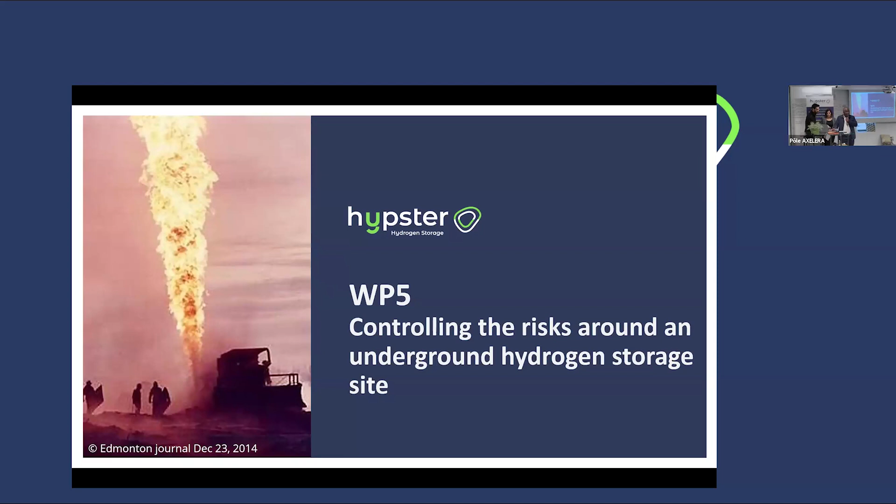Thank you so much for having me. I will now present... okay, thank you so much for having me. It's not working. No. Another mic, okay. Maybe you can talk about the picture. Yes, I can, is it okay? Yes.

I'm from INERIS, the French National Institute for Industrial Environment and Risk. I'm in charge of INERIS's contribution to the HyPSTER project, but I'm not alone here. I come with two colleagues, Sylvain Pic, senior safety engineer, and Benno Weinberger, our hydrogen expert.

As an introduction, Europe has made the development of a green hydrogen industry a priority in its strategy to combat climate change. The HyPSTER project is a great opportunity to develop experimental facilities in France to store green hydrogen in salt caverns.

This opportunity should pave the way for developing a hydrogen sector at industrial scale, which could be replicated technically and economically across other countries. At INERIS, as a reference institute on industrial environment and risk, we consider hydrogen a promising alternative energy to fossil fuel, which can be created with renewable or low carbon energy. INERIS is very proud to contribute to this kind of project.

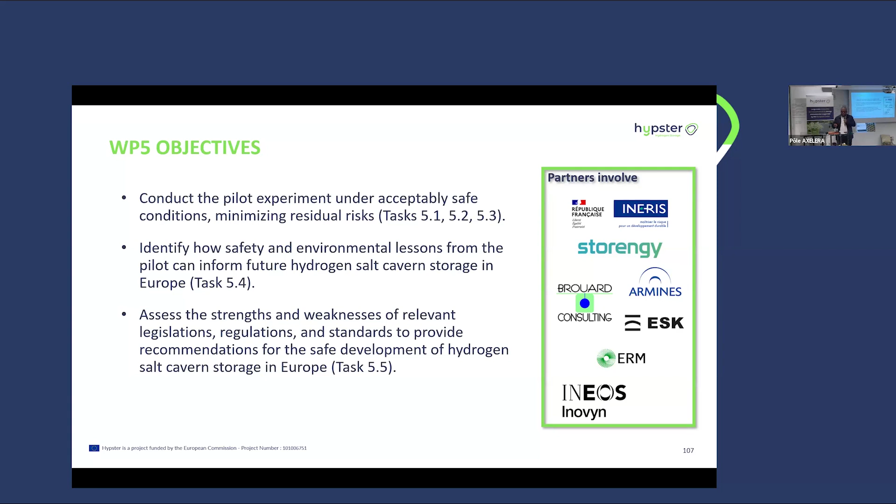So what about the challenges? The first challenge was to evaluate the risks: to identify, assess, and control all types of risks the pilot could pose to people and the environment. We did a lot of study on risk assessment, with a risk methodology in my company developed with the contribution of Storengy and other partners. We also did geomechanical assessment of the very worst case scenario.

As you saw in the previous presentation, we are trying to build a demonstrator, and from a risk point of view, we try to analyze the very worst case scenarios, such as a rapid injection of hydrogen, a rapid withdrawal of hydrogen, or fast cycling of hydrogen.

Another good result of this work package is all the work done around blowout modeling. What is a blowout? It's kind of the very worst case scenario we can have: an uncontrolled release of the stored hydrogen when the safety equipment around the well fails. All the stored gas or hydrogen goes out to the atmosphere, and we did a lot of modeling, both underground and aerial, to calculate the effect distance of this very worst case scenario.

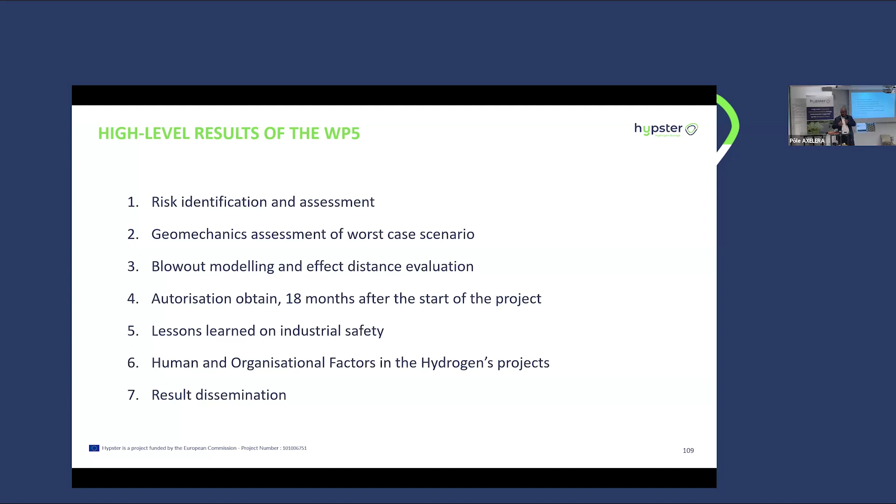We also did a lot of work on what we call in French 'retour d'expérience', lessons learned from the project on industrial safety, and also from the human and organizational factors of hydrogen projects. And we had the chance to publish a lot through this work package, disseminating our findings.

So the challenge was the risk and environmental impact assessment with INERIS, Storengy, and ESK, the contribution of numerical modeling to cavern storage risk evaluation, as I just explained, and the relation with the French administration. We are public, but the relation is with the DREAL, the local administration.

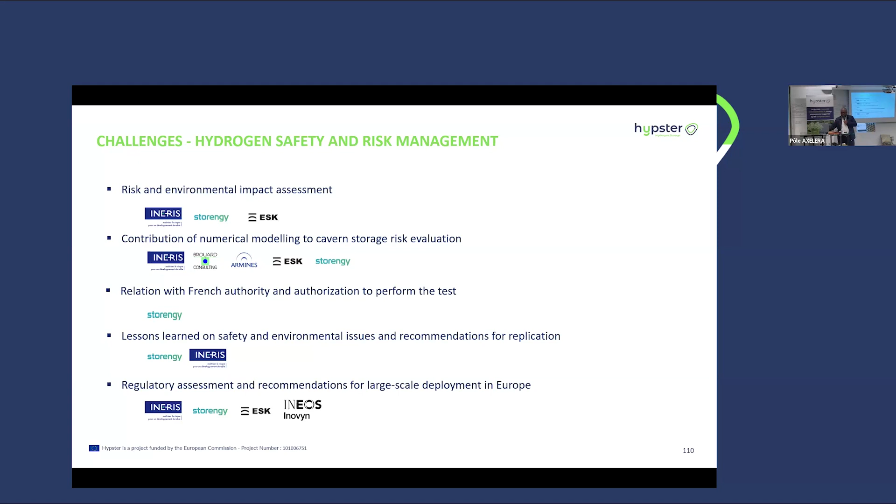And as I just said, the lesson learned on safety and environmental issues and recommendations for future storage. And the last point, regulation assessment and recommendations for large-scale deployment in Europe. That was an objective of the project. So I will take the time now to explain a little bit the results of the project.

I cannot go deep into all the work we have done in work package 5, but I will focus on the main things. Firstly, on hydrogen.

Hydrogen is a special molecule that has characteristics that are favorable to safety and not favorable to safety. For characteristics favorable to safety, hydrogen is a non-toxic gas. It's light, so this reduces the risk of accumulation. There is a low radiation flame, so it limits risk of propagation.

And there's a lot of characteristics that are unfavorable to safety, like it is easily flammable. As you can see in the graph, the flammability range of hydrogen is very big. And with that, it has a low minimum ignition energy. Hydrogen can generate very violent explosions, can easily leak because of the small size of the molecule. It can weaken materials. Grégoire talked about it. We can implement it at very high pressure. It is difficult to detect, as it's invisible, odorless, etc.

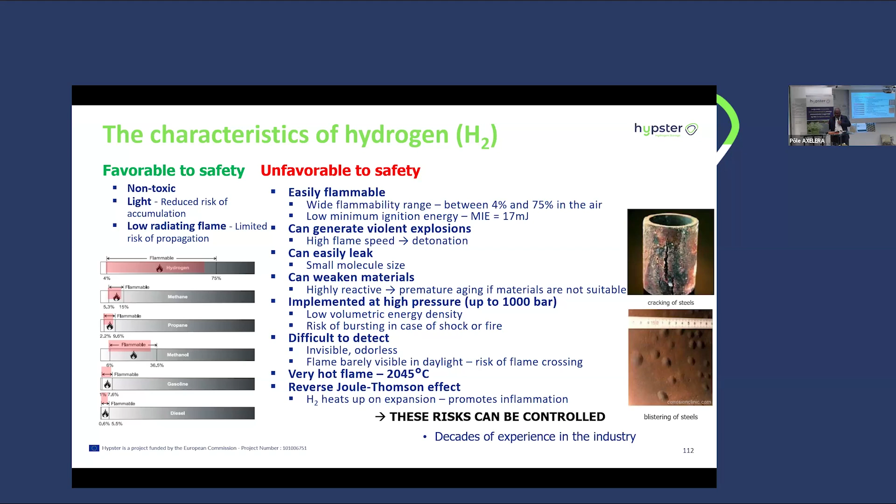But all these risks can be controlled. At INERIS, we have decades of experience manipulating hydrogen in industrial environments. We regroup all the risks in 4 main categories. Work package 5 really focuses on geological and safety risk, while, as you just saw, the technical and economic risk was dealt with in work package 3, work package 4, and the operational risk, like hydrogen embrittlement and choosing of materials, was done in work package 3.

So for the safety risk, as I just said, we have high flammability, explosion hazard, and we studied flash fire, jet fire, explosion, and anoxia risk in this work package.

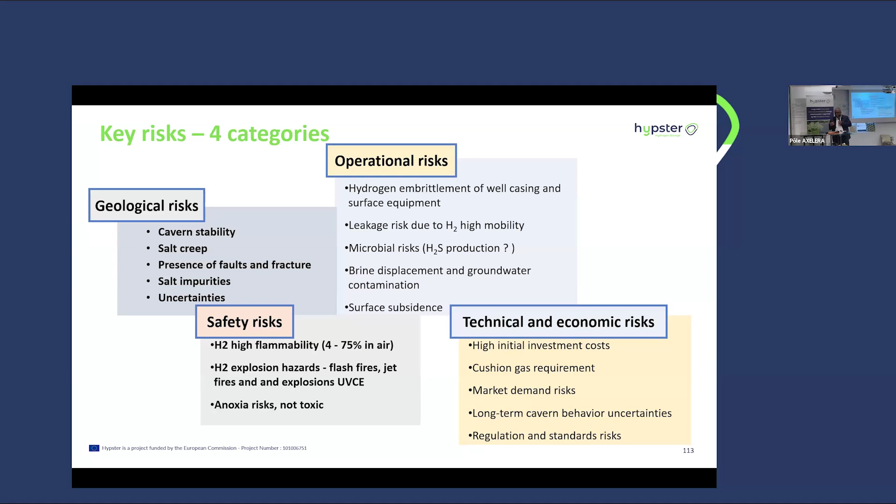And what about the geological risk? About the cavern stability, we want to store hydrogen in a salt cavern. We want to inject and withdraw hydrogen very fast. What about the mechanical stability of all that? What about the tightness of the wellbore, the salt creep, the presence of faults or fractures, etc.? We study all this in this work package.

Okay, a few words on risk analysis. We conducted, together with Storengy, risk analysis on this project, and it started with the preliminary risk assessment, done on 2 platforms. The first platform is for hydrogen storage in salt cavern, and the second platform is for hydrogen production. There was a clear methodology.

The study was led by my colleague Sylvain Pic, who studied the product hazards in the system: the brine, the hydrogen, the compressed air, the nitrogen, etc. Then the process and equipment hazards - we reviewed all the equipment involved in those 2 platforms, together with surface facilities, etc. We tried to learn from existing documentation on how companies deal with hydrogen in salt caverns, what types of accidents they've had, etc.

And we concluded with results that define the major hazardous phenomena: flash fire, jet fire, explosion, burst, or toxic effect. And the central feared event was mainly the loss of hydrogen containment, ATEX formation, overpressure, and release.

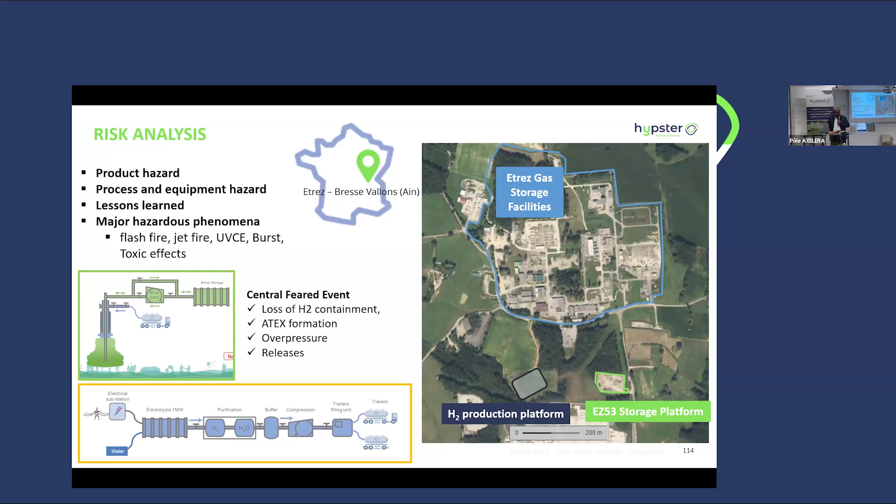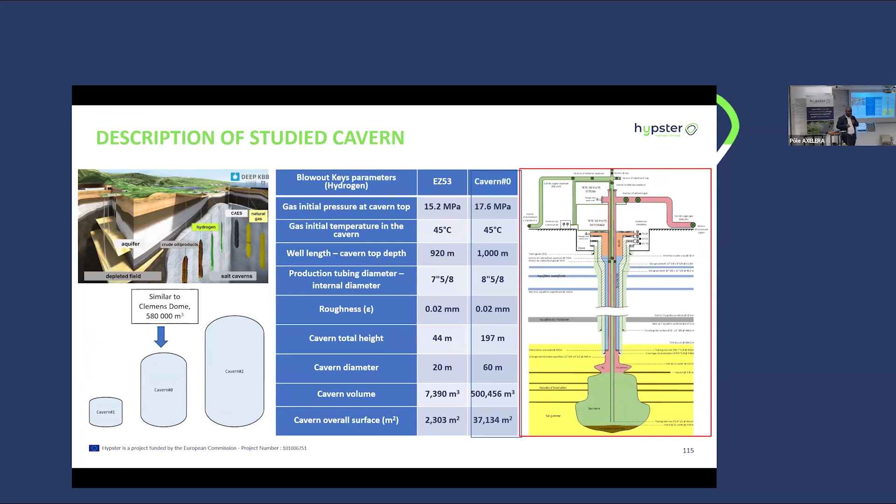Okay, for the geological risk, we decided at the very beginning of the project not to study only the EZ53 salt cavern. Why? Because that cavern is very experimental - it's very small, only 82 tons of hydrogen can be stored in that cavern, and if we withdraw the cushion volume, only 40 to 42 tons can be used. That's why we chose to also study a generic cavern with a bigger size, 500,000 cubic meters in geometric volume, comparable to one cavern used now in the United States to store hydrogen in Clemens Dome.

So we did a lot of study because we wanted clearly to know, in studying the very worst case scenario, as I just said - rapid depressurization, fast injection, fast cycling - what is the behavior of hydrogen inside the cavern, and how can cycling or loading and displacement of this hydrogen inside the cavern affect the mechanical stability of the cavern, and the rock mass around the salt cavern.

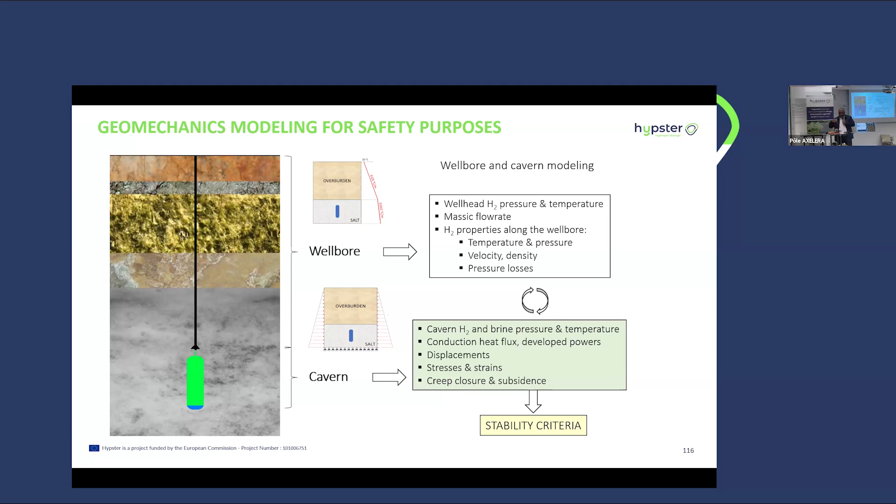So we divided the problem in two: in the modeling, there's the wellbore problem and the cavern problem. For the wellbore problem, you need wellhead hydrogen pressure and temperature, mass flow rate, hydrogen properties, temperature and pressure, velocity, etc. And for the cavern problem, we did a kind of coupled modeling from thermodynamic to geomechanic, to really assess the strength, the stress, the creep closure, the subsidence, etc. And to assess the mechanical stability, we use some criteria.

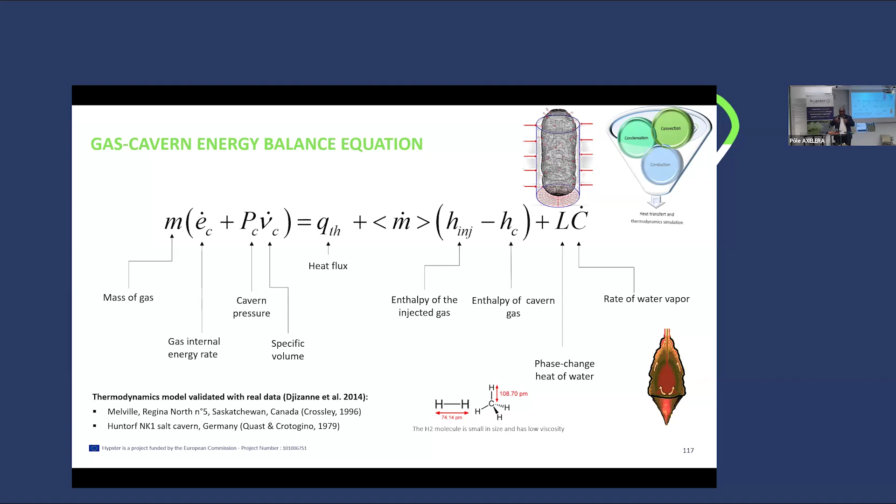First, for the thermodynamic modeling, we develop a model that states in its equilibrium equation that the internal energy inside the salt cavern should be in equilibrium with the heat flux coming from the rock mass, plus the enthalpy of the injected hydrogen and the possible condensation of water inside the salt cavern. This model was already validated in natural gas caverns, and we are willing to finish the cyclic test to revalidate it with real EZ53 data.

So as I've just said, we use some mechanical criteria to evaluate the stability of the salt cavern. The first one was the creep closure. The rock salt has a very complex behavior. It's elastoviscoplastic, highly sensitive to temperature. When we model the behavior of rock salt and the behavior of the cavern, we use creep law.

In this project, we use a very complete creep law that takes into account the dislocation creep, the primary and secondary creep, and also the pressure solution creep. That's important when the salt is under very low deviatoric stress.

So we don't want to have traction at the cavern wall or in the rock salt. That's another criteria. So when we're doing numerical computation, the least compressive principal stress should not be a tensile stress. And we also have a criterion around the dilatancy, which is the criterion where the deviatoric stress has to be much higher compared to the mean stress.

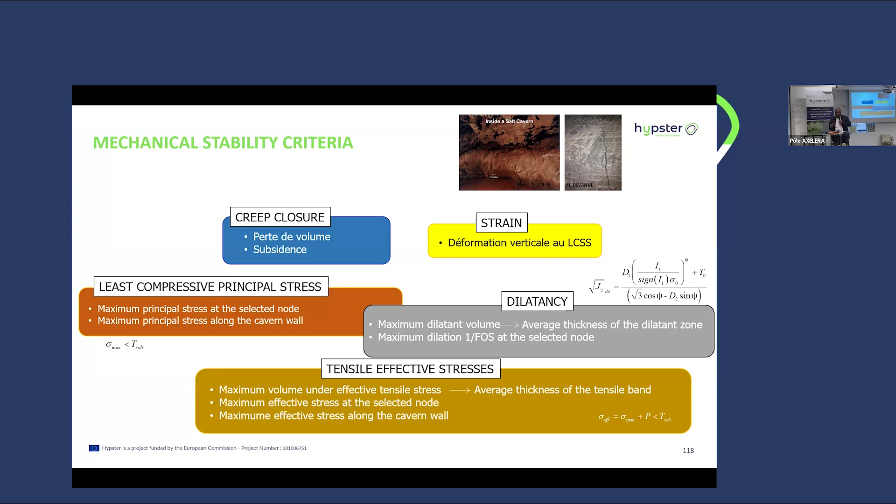So we did all this modeling in a software developed by a HyPSTER partner, Benoit Brouard, called LOCAS 3D. And I can show you some results here. Here I'm showing the result of the deviatoric stress and the factor of safety of the salt cavern when it is submitted to a blowout.

When there's a blowout, the pressure drops to atmospheric pressure. And as you can see in this modelization result, there is evolution of the deviatoric stress around the salt cavern, and there is a zone around the salt cavern, a very close zone, where the salt is damaged.

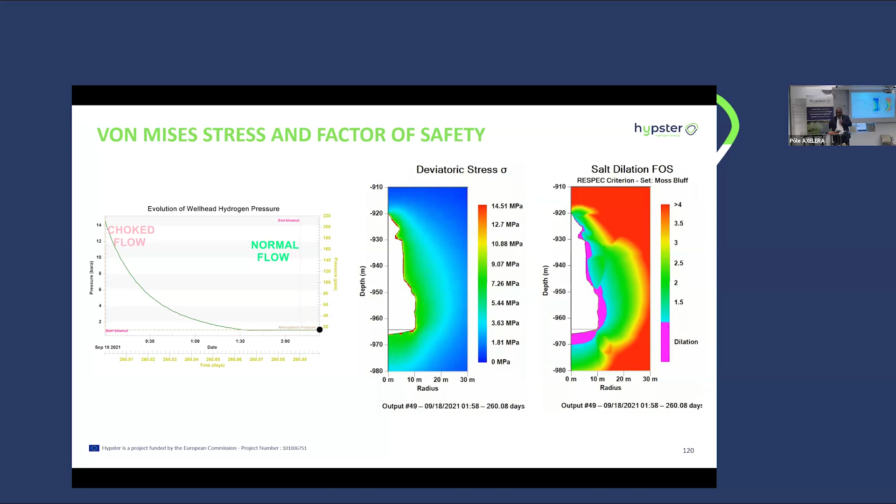And I also show you the result in terms of displacement. We calculate the vertical displacement and the horizontal displacement around the salt cavern. I should say that for this modelization, it's a very, very worst case scenario, so the cavern is fully full with hydrogen, which is not the case in the HyPSTER project. As Gregoire just showed, we will fill only the upper part of the salt cavern. You can see the evolution of vertical displacement around the cavern.

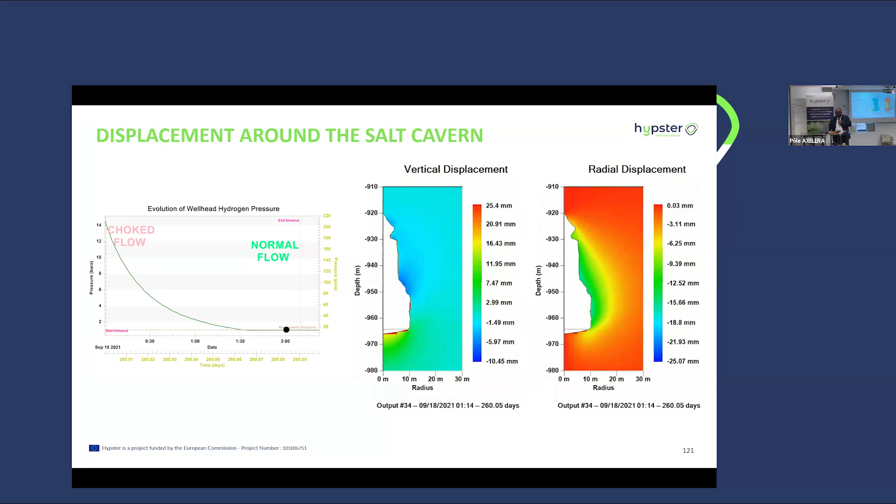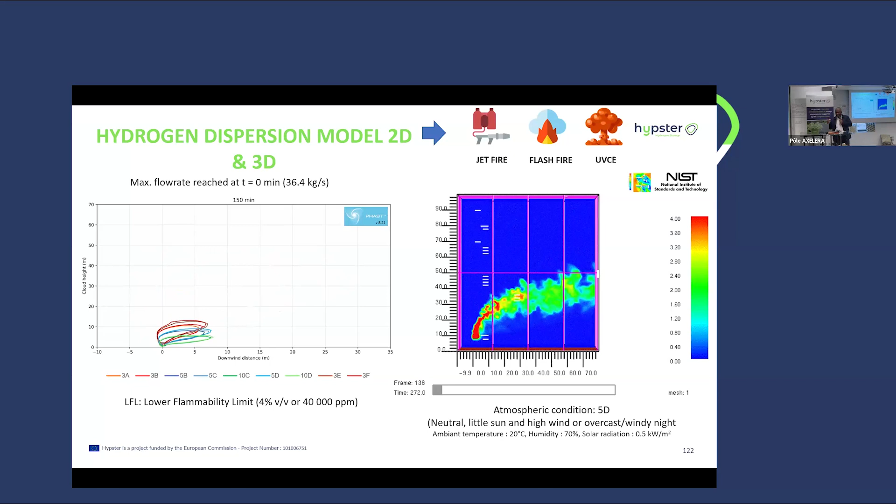After this result, we did a lot of numerical computation for when the hydrogen goes out, following, for example, the failure of the wellhead. We can modelize the dispersion of the hydrogen in the atmosphere, as you can see in 2D and in 3D. And we compared a lot with methane to see how big is the extension of the cloud when the hydrogen goes out in the atmosphere.

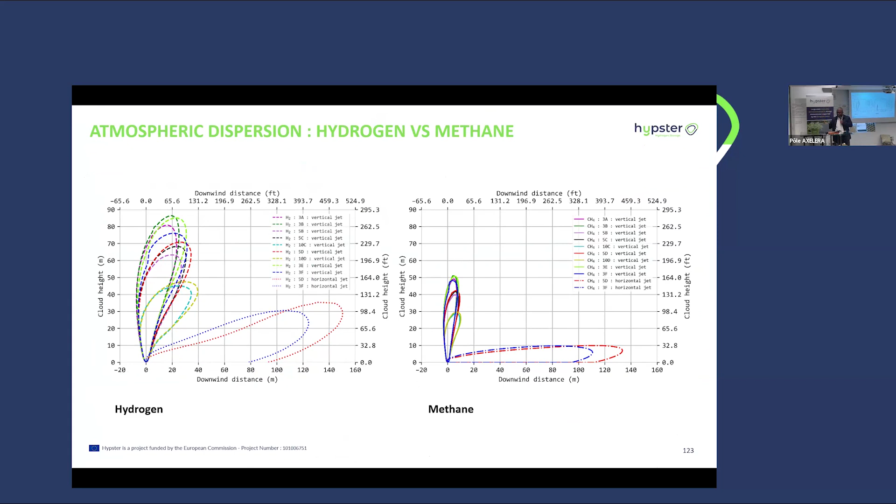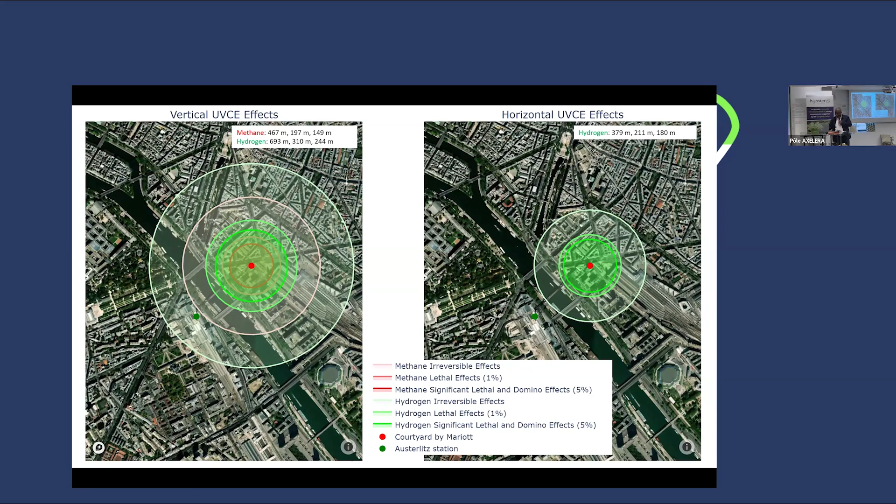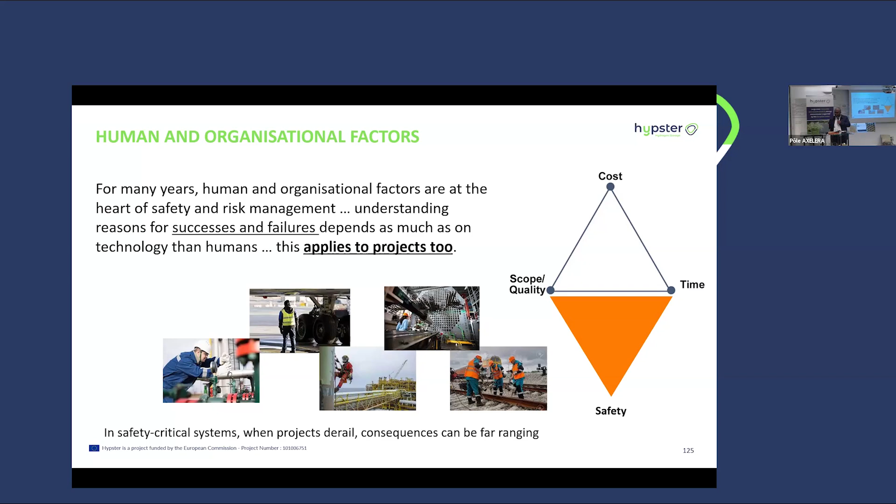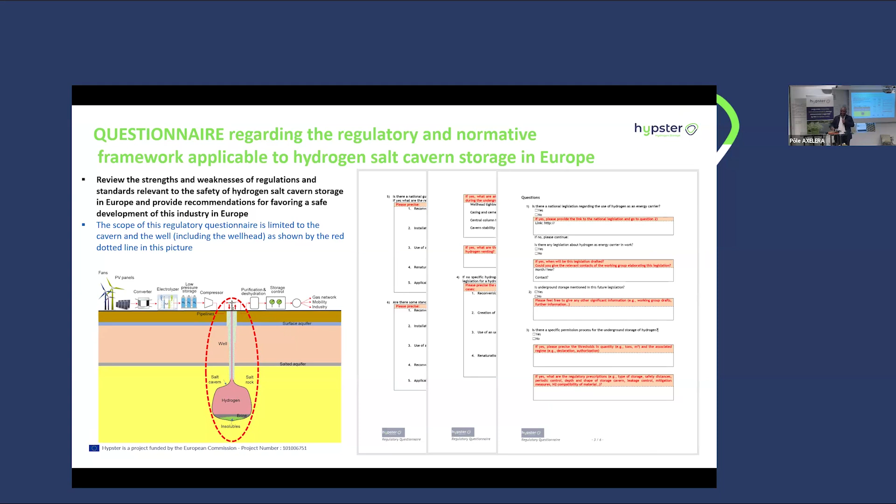And my last slide will be regarding the regulation. We did a lot of work on the normative and regulatory framework related to hydrogen storage in salt caverns in France and Europe. My colleague Benoit Wemberger is in the room. He presented this result in Canada last year at the UHS, and he'll be pleased to answer all your questions.

So what's the next step of this kind of work? First, we want to pursue the modelization of worst case scenarios. We want to improve the thermodynamic model of the salt cavern with in-situ measurements that will come in 3 months from storage. We will try to model the hydrogen leak path through cement, rock salt, and porous media.

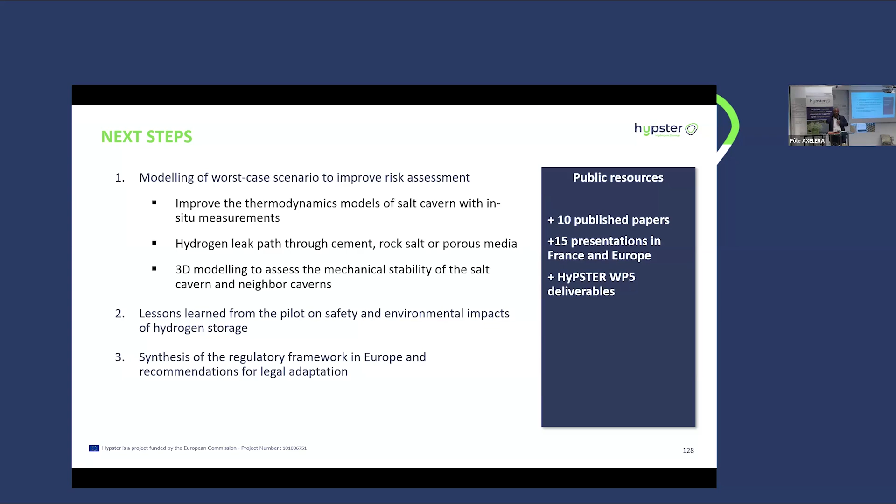Thank you. Do we have some questions?

Perfectly clear. Oh.

I have many questions, I'm Sylvie from Equinor, but maybe just your thoughts on public acceptance of having several tons of hydrogen stored subsurface close to where you live, or this not in my backyard type of policy. For the HyPSTER cavern, you have 3 tons of hydrogen stored there, or you will have in a short while. Given the fact that the downhole safety valve, as I understand, was not properly tested, it will be tested by the end of the project. So how do you do workover operations on the wellhead when the downhole safety valve is not properly tested, with people around on top of that? Do you have any thoughts on that? Regarding safety distances, snubbing operations, things like that?

I will start the answer, and I will give the floor to my colleague Benoit to complete, and maybe Stoanji will have a few words on that. We have the chance with the HyPSTER project that we are already in an industrial site. It's an existing cavern in an industrial site with a lot of caverns around.